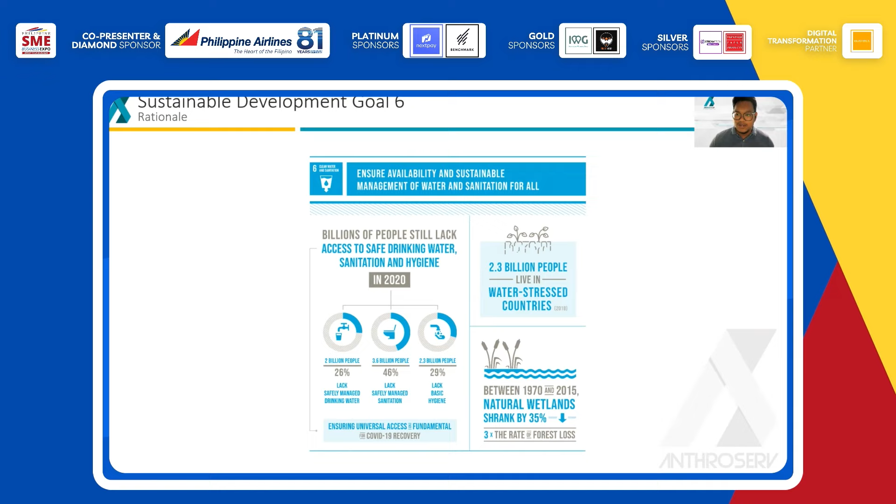So to start, we look at the status of the world in terms of the lens of the Sustainable Development Goals. We know that there's a Sustainable Development Goal 6 that is focused on ensuring availability and sustainability of water and sanitation for everyone. Unfortunately, this is the status of the world in terms of drinking water access, sanitation access, and basic hygiene.

So, those are the numbers. Up to 2020, there are still 129 countries that are not on track to have sustainably managed our water resources by 2030. So the UN SDG tells us that our current rate of progress on water and wastewater management needs to be doubled. Now, we know that currently, we are having another imminent water crisis.

We have very low water resource capacity right now. And in terms of wastewater, we don't really appreciate it because we think that it really doesn't affect us. But later, I'll show you how it is directly and indirectly affecting our lives and our businesses.

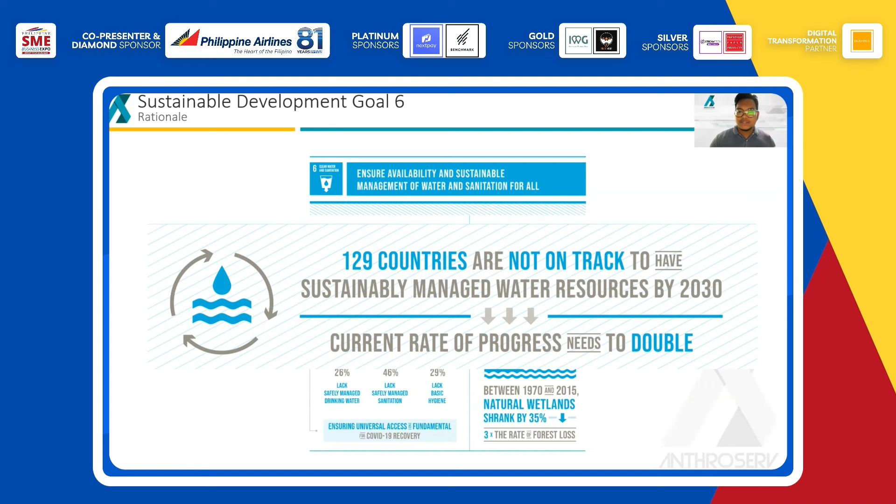So let me start by, of course, defining what is wastewater. Wastewater, in simple terms, is used water. So if it does not already serve its original intent, it is already considered as wastewater. And we classify wastewater into three: residential, commercial, and industrial.

So why do we have to classify our wastewater based on these three? One, of course, because they have different qualities. The wastewater produced by residences is different from that of each type of commercial and industrial establishment. But the second, and most important reason, is that the state does not require residences to have their wastewater treated.

In the context of Metro Manila, we have the water concessionaires, Maynilad and Manila Water, who are responsible for treating the wastewater of the residences. However, commercial and industrial establishments are not covered. So they have the obligation to have their wastewater treated by any means, whether through third-party treatment or on-site wastewater treatment.

This is very important in the context of this expo, because if you're a business owner and you own your own facility, and of course it is tagged as either commercial or industrial, you have to know that you have to treat your wastewater.

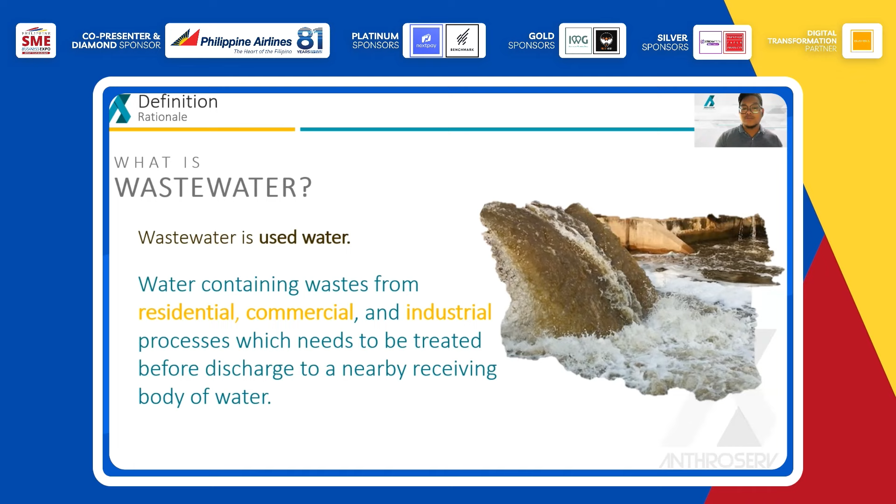What is the basis of wastewater treatment? Of course, we have first the legal framework, or the legal rationale. This is anchored by RA 9275, which is the Philippine Clean Water Act. And its implementing regulations are defined in DAO 2016-08 and the recently passed revision, DAO 2021-19. We also have PD 856, or the Code of Sanitation of the Philippines. So those are the legal frameworks that we have now in the Philippines.

But the most important is the social impact. First, the health risk. It has been studied that lack of wastewater management increases the risk of diarrhea, hepatitis A, and leptospirosis. And then obviously, we have the environmental impacts, destruction of nature and ecosystem.

But to better appreciate it, if we combine all these effects economically, the World Bank estimated in 2008 that we are losing 77.8 billion pesos per year due to poor sanitation. This is due to sickness or inability to access free water, like our groundwater here in Metro Manila.

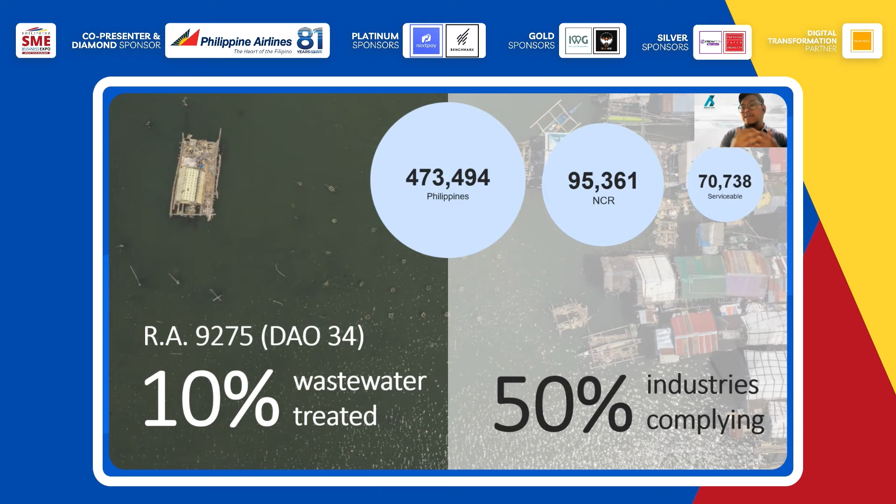So we are here. I am here. We are Anthroserv, and we are here to give you alternatives on how we could bridge this gap. First, we have to identify — we have to know the waste management hierarchy.

Of course, before we think about wastewater treatment, we have to think first: could we reduce our wastewater generation? That's the first step.

If you could reduce, you could analyze the water — how you use your water in your facility. You can reduce, and of course, that reduces your wastewater generated.

If that's not possible, you could do on-site recycling — maybe one process's water could be diverted into another process as raw water. So you could do that. These two practices are what we call resource efficiency and cleaner production practices.

But of course, you really can't avoid generating wastewater. So we have off-site recycling, treatment, and ultimately disposal — which is what we're trying to avoid, disposing untreated wastewater. These are called end-of-pipe treatments.

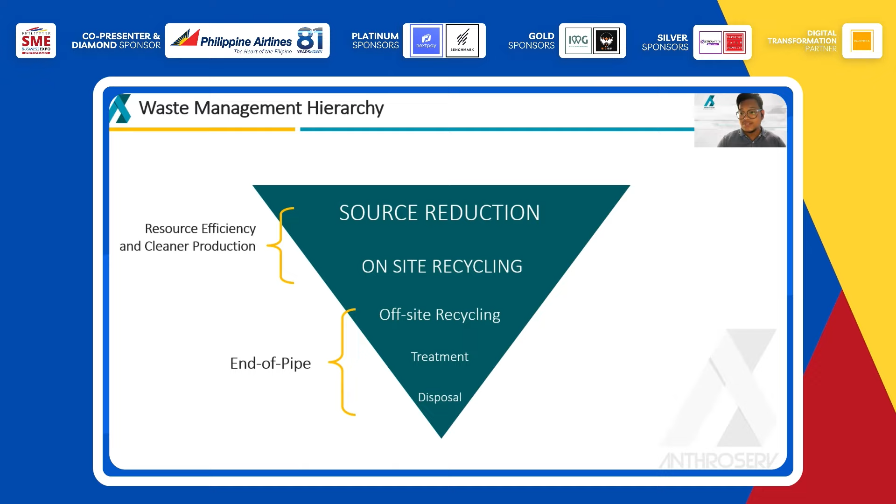So before we talk about how to treat the wastewater, let us always look first at how we could reduce wastewater generation, and how we may introduce on-site recycling. Anthroserv offers consultancy services for facilities to do this first, prior to wastewater management.

In terms of wastewater management, there are two strategies. The first is what we call the sewerage strategy, and the second is the sanitation strategy. We could differentiate them by looking at our septic tanks.

For septic tanks, the common type has two chambers — the first and the second. In the first chamber, solids build up. Usually, this is what gets hauled out by our trucks, and it is treated. That's the sanitation strategy.

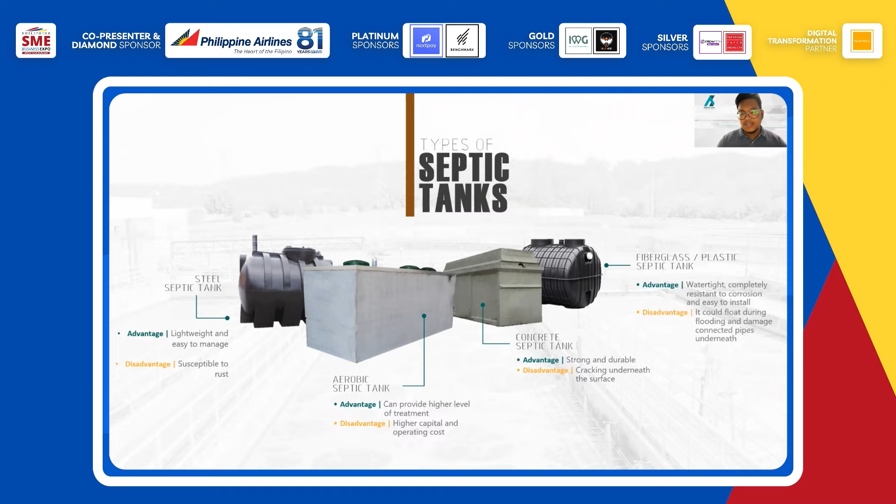So we have here the different types of septic tanks. Of course, all facilities have their own septic tanks. To manage your septic tank, based on the sanitation code, you have to have it collected — about a 5 to 7 year cycle.

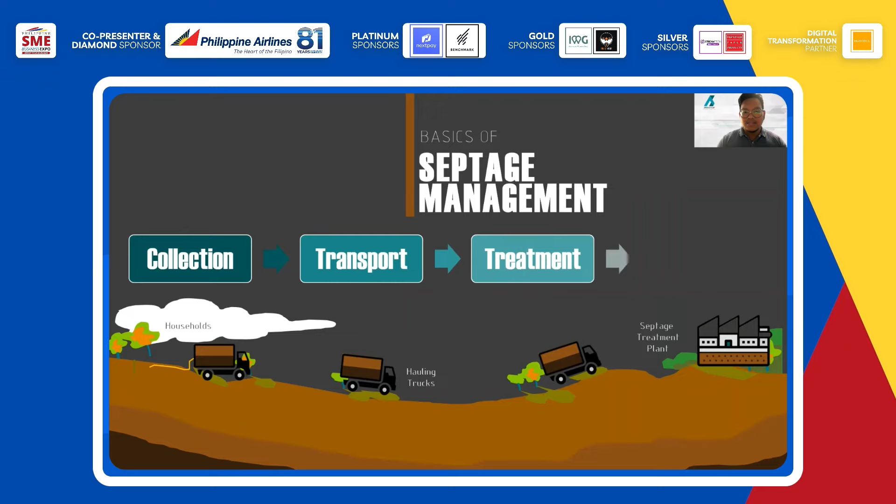You have to haul your septage, as it's called, and this is the basics of septage management — you have trucks to collect and transport it to a certified treatment facility prior to disposal. That's septage management. Next, we've seen the sanitation component, the septic tank.

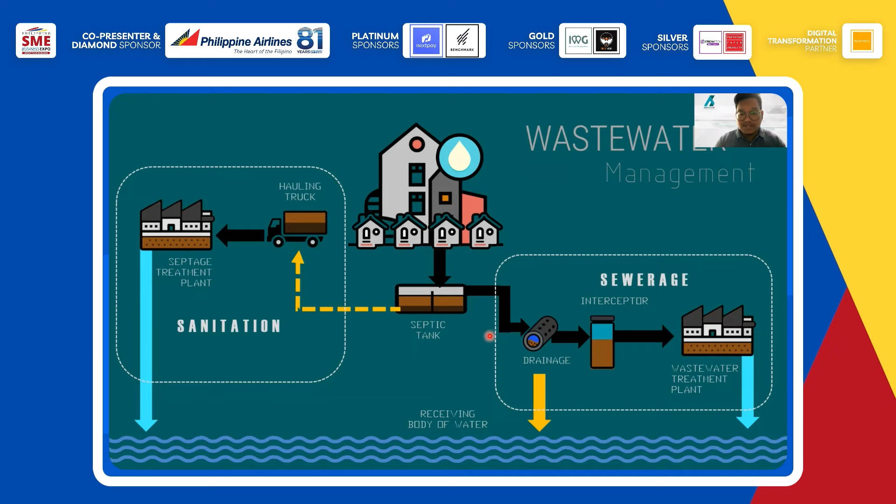Now let's look at the liquid component — how do we treat the sewerage? This is what we call wastewater. So this is the sewerage strategy.

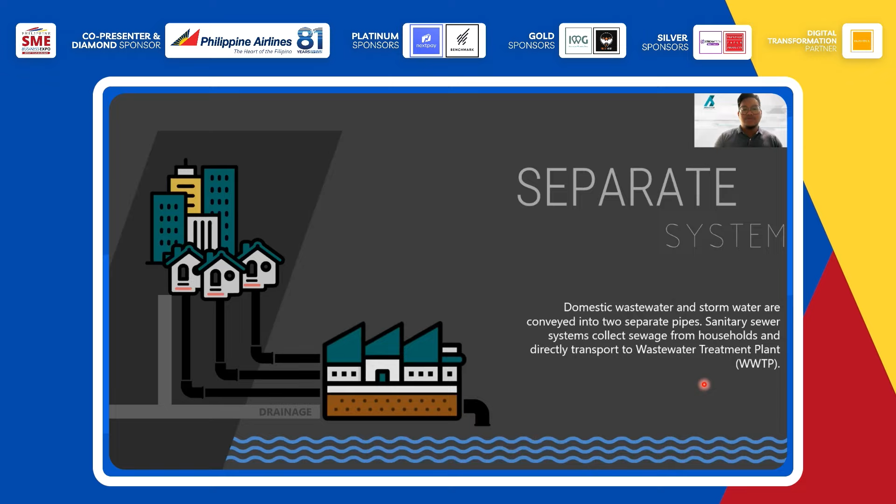The sewerage strategy can be further classified into two. The first is the separate system, where pipes tap directly into the septic tanks, directly to the wastewater treatment plant. If you have a facility and know there's a nearby wastewater treatment plant — for example, if you're in Metro Manila — you could ask Manila Water to have you connected. But of course, they'll analyze first if it's possible. That's the separate system.

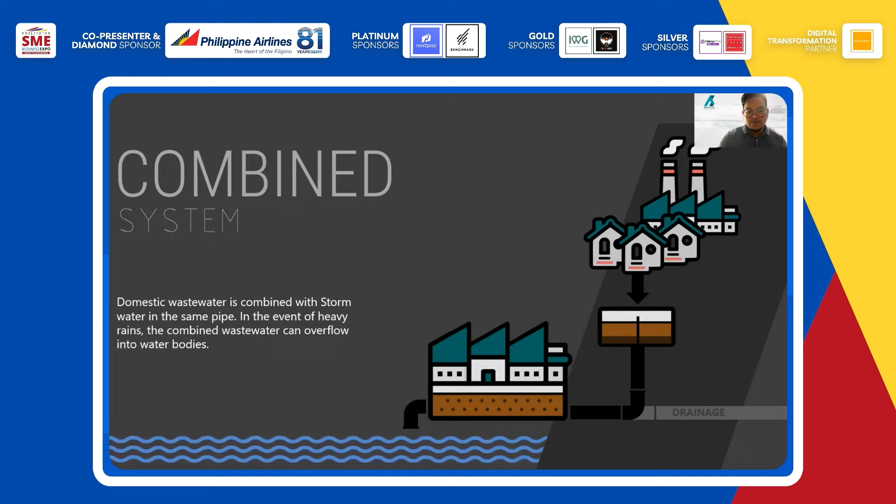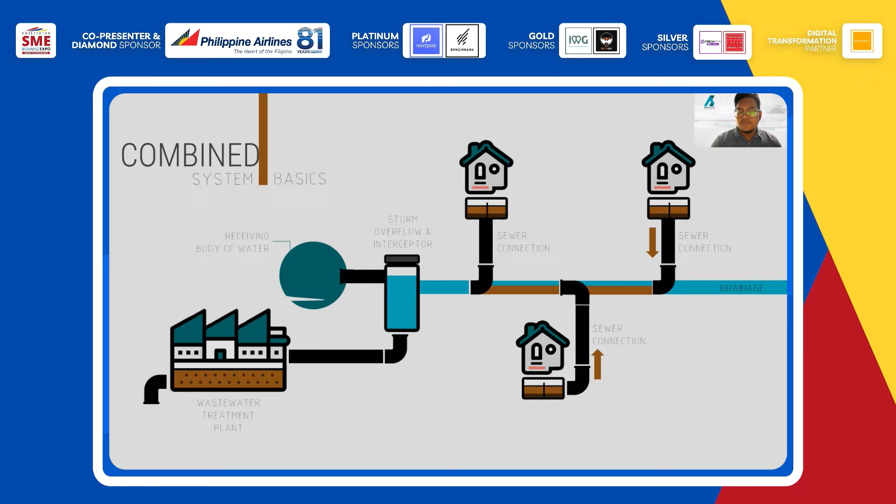Next is the combined system, which is the faster alternative — you just connect to the drainage, where the drainage is intercepted and diverted to a wastewater treatment plant. This is commonly implemented in residential areas. Usually, if you are commercial or industrial with specialized wastewater, you have to have your facility directly tap into a sewer pipe.

Now, this is the environmental impact. Let's go into the specifics. So these are the usual parameters that are being treated: BOD, COD, TSS, up to pH. And all of these are pollutants in their own manner, with different sources.

The BOD, COD, TSS, ammonia and nitrates, fecal coliform and phosphates all come out from us, from our feces, from our discharges. And others like oil come from households. And of course, it differs depending on what type of facility you have.

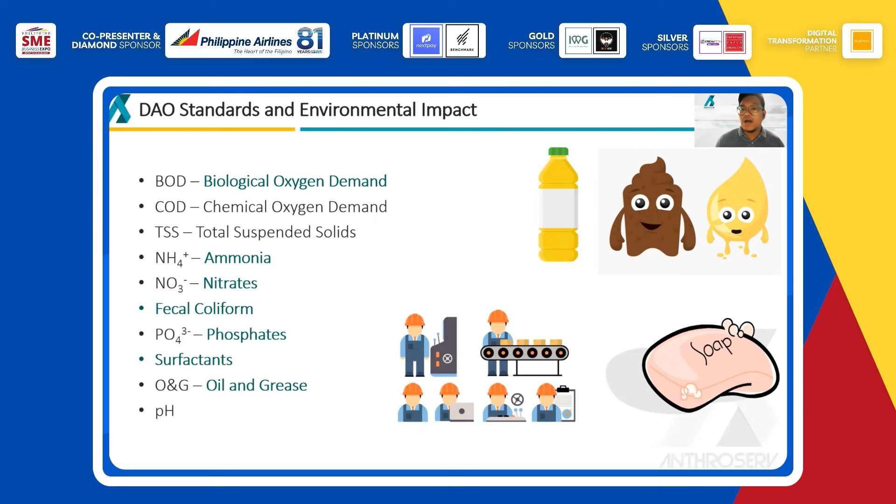Its impact is undeniable. For example, if we discharge high BOD in the receiving body of water, we could expect a fish kill in the long run. And if we have high solids in our wastewater, we could expect sludge buildup in the water body.

So this is the reason why we see algal blooms. There have been recent reports of algal blooms, particularly in Boracay. That's what incited the closure of Boracay, because of them not treating their wastewater. So these are the impacts.

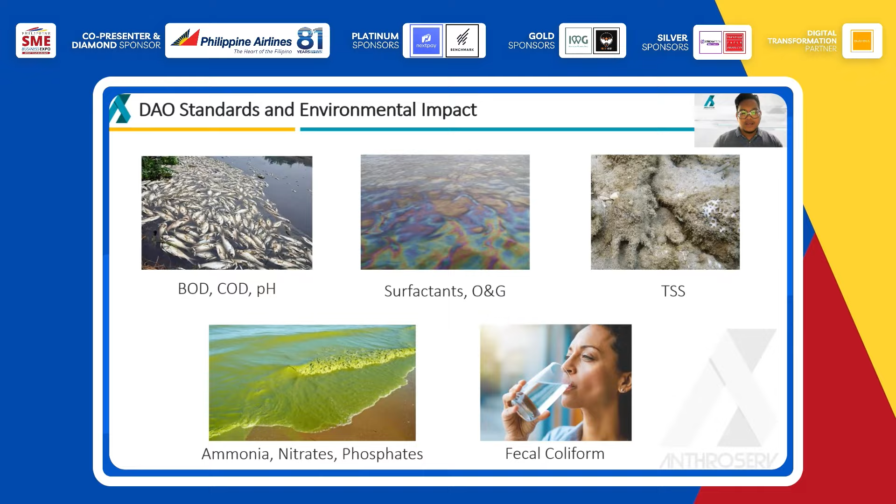Now we go to the first point. We identified three common causes on why businesses do not treat their wastewater. The first is lack of access to technologies. So let me show you the different treatment technologies that the market has.

This might be complicated, but what I'd like to emphasize here is that a wastewater treatment plant is like a puzzle that you need to solve. There's really no wastewater treatment technology that can solve everything.

Unlike what many technology providers would say, because they are selling their own product, they'll say it works for everything. But we believe otherwise, because wastewater treatment is a puzzle.

Depending on the type of wastewater you have, what you want to treat, and how clean it needs to be, there are different processes or technologies that need to go hand in hand. So we have physical, biological, and chemical processes, as shown in the picture.

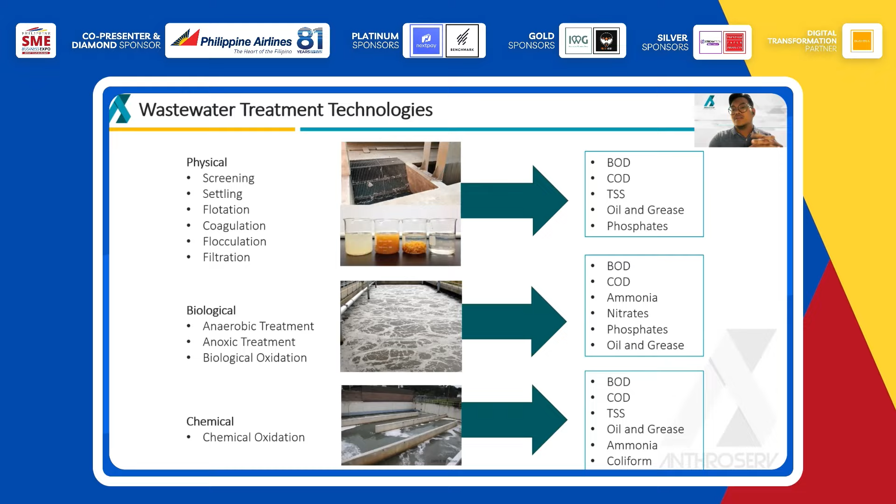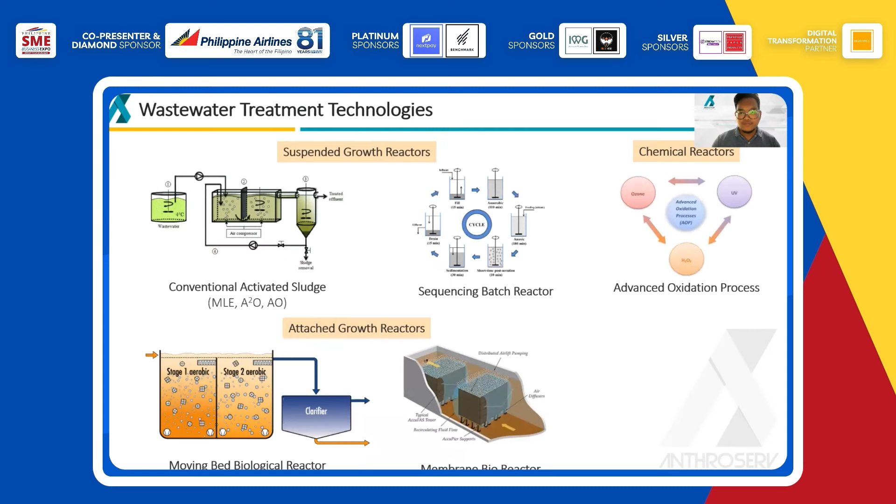But we could classify them into three: suspended growth reactors, attached growth reactors, and chemical reactors. These are common in the market. Usually, as a business owner, you just need to consider which one fits you, considering lot area, capital expense, operational expense, maintenance, complexity of operations, and process durability.

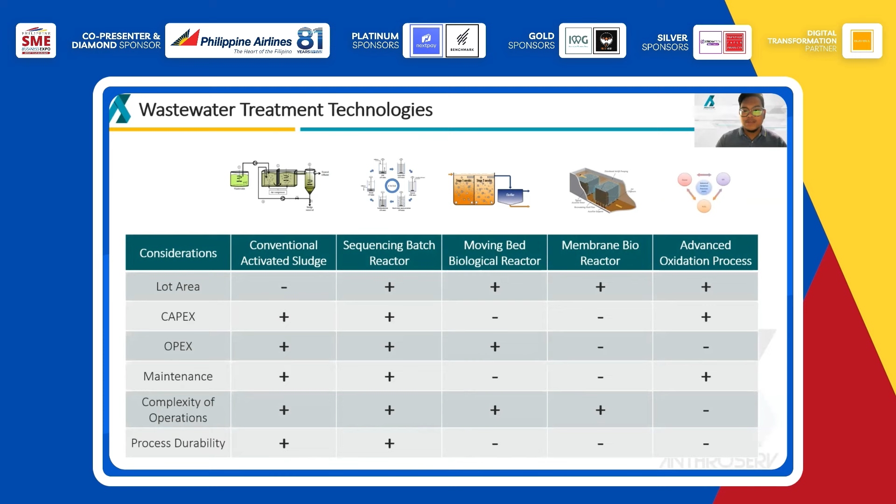This is our qualitative assessment of each technology, but of course they have their own strengths and weaknesses. This table doesn't say that the SBR, or sequencing batch reactor, is always the best. It depends on the client's needs. So if anyone tells you their technology solves everything, it is not true. It really depends on many factors.

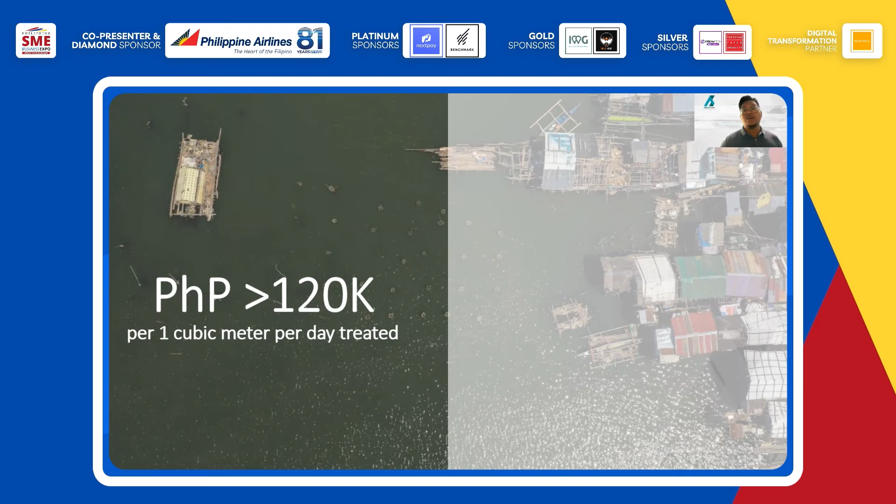Next question, how much is it? Usually its cost is around 120,000 pesos per cubic meter treated. So, for example, if you're generating 20 cubic meters per day, your capital expense would be 2,400,000 pesos. And it's bound to increase by 50% because of the new standards.

Yeah, so this is quite painful. It's not really an investment if you think about it, but you're going to really invest a lot, as much as millions, to do that.

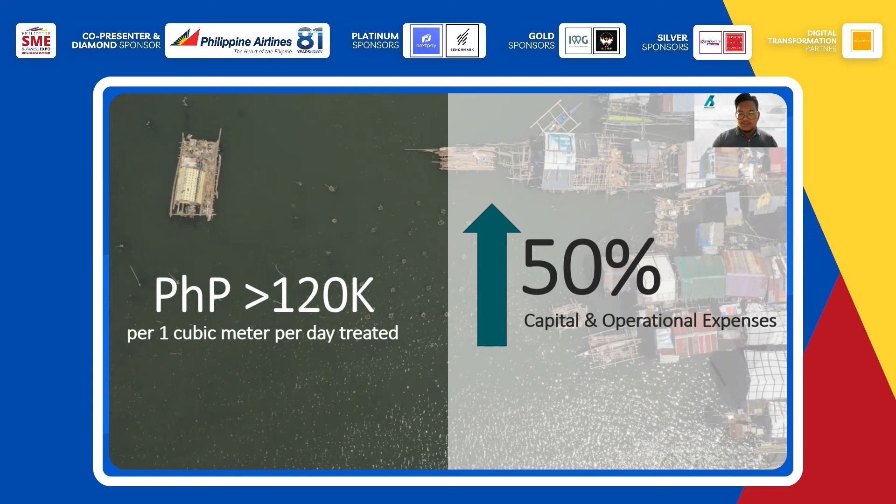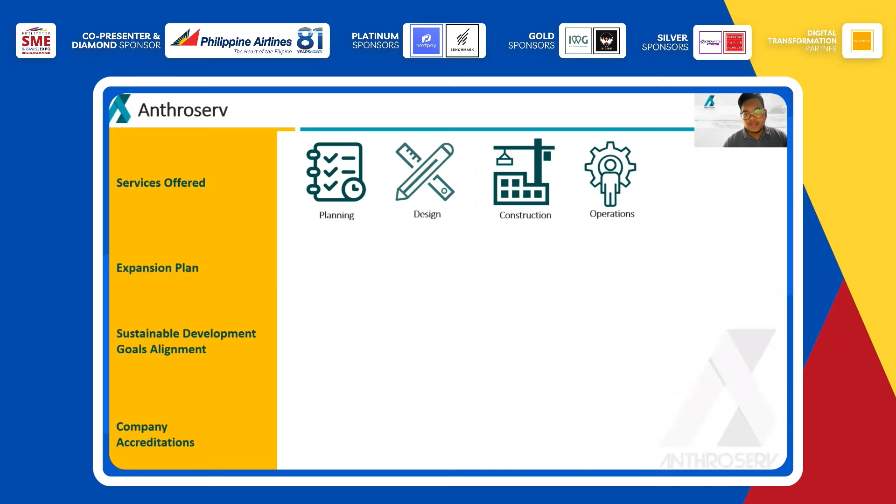That is why Anthroserv developed a low cost solution. But we do offer customized solutions depending on client needs. We do planning, feasibility studies, design, construction, and operations. But apart from wastewater, we are expanding our engineering services to water, energy, industry infrastructure, and industry efficiency.

But we're focused right now on SDG 6 because this is where we see the most need in the market right now. Our thrust is towards the attainment of Sustainable Development Goals 6, 7, 9, and 12.

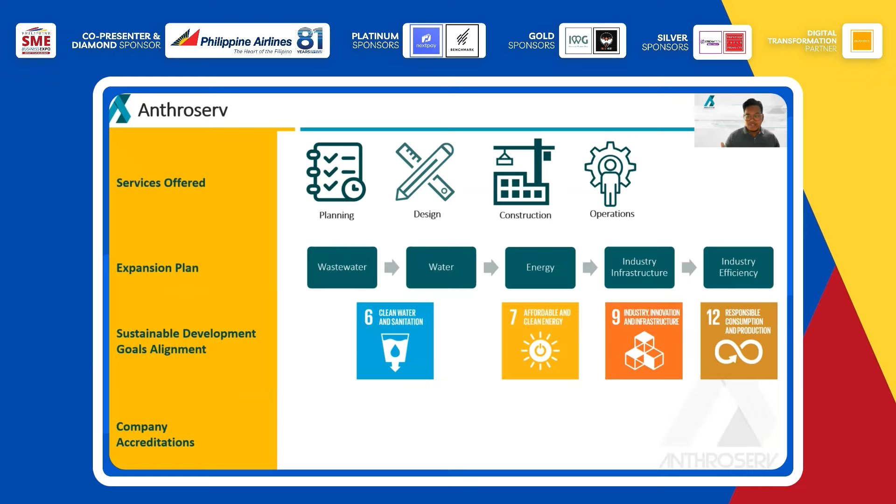We do offer that, but for MSMEs who have a very limited budget, since they're just starting, yeah, we have developed our own product.

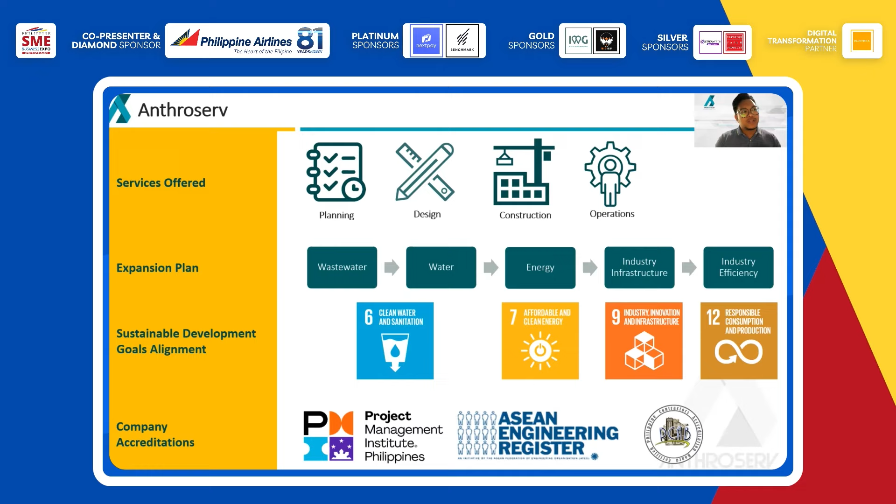That is a wastewater treatment plant in puzzle form. It is ultra low cost, we call it AquaBlocks.

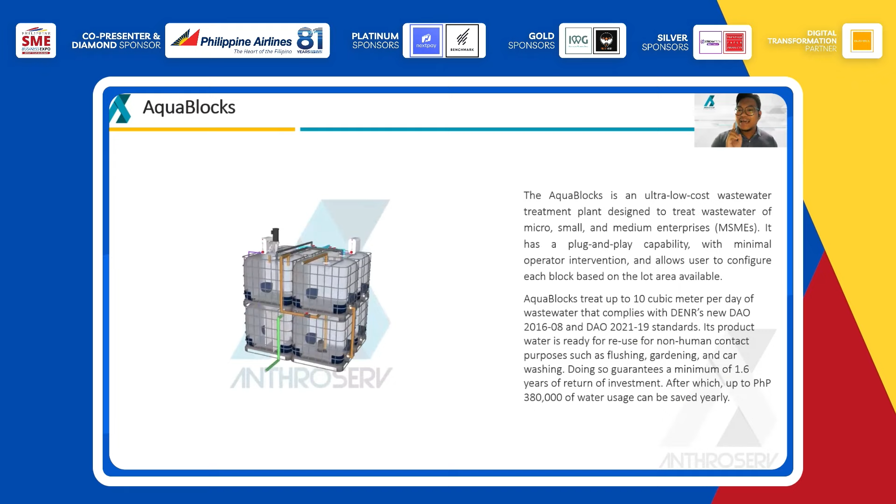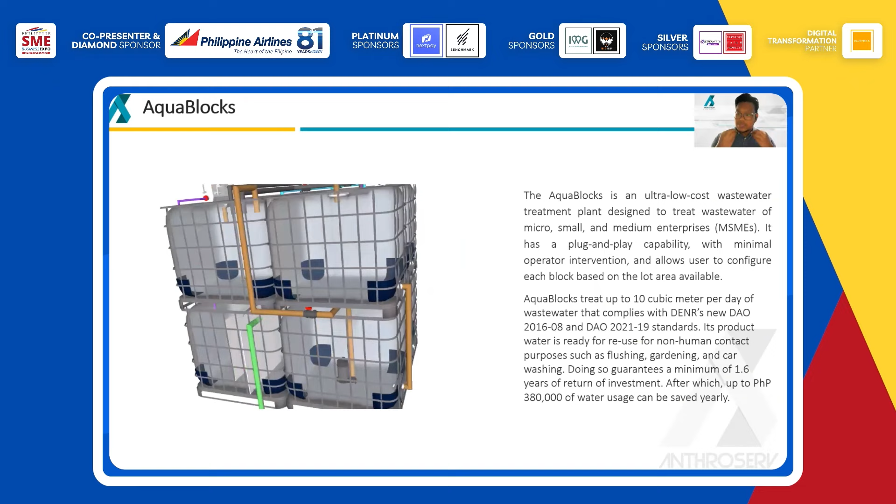It is an ultra low cost wastewater treatment designed for MSMEs. It has plug and play capability, meaning when you order it from us, we bring it there, install it, and it automatically treats your wastewater. It allows configuration depending on the need, of course we have to assess first what you need. It could treat up to 10 cubic meters per day since these are for MSMEs only.

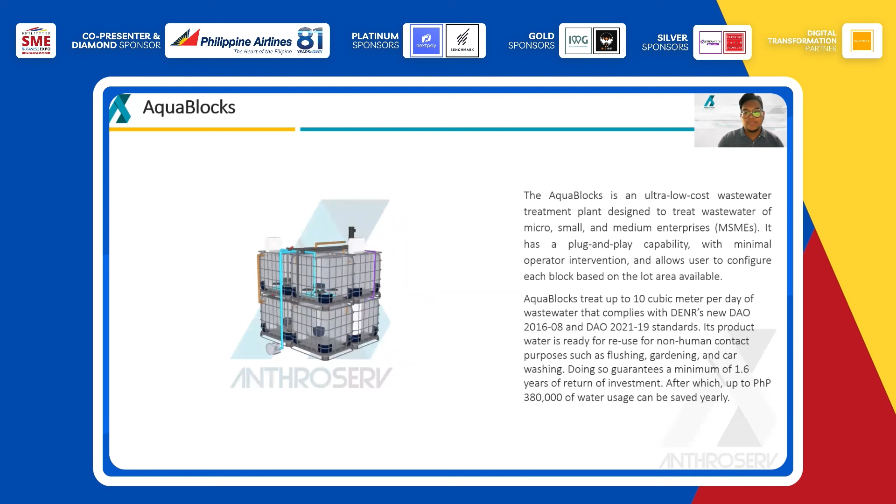It can produce water that is ready for recycling. We shifted the view of it from being a non-profitable investment to a profitable investment, because you could generate savings up to 380,000 annually if you use this product. So let's go to the specifics.

It costs around 900,000, and it already includes everything that you need: drawings, reports, chemicals, startup manuals, training, product warranty, and a discharge permit. All legal compliance is already there.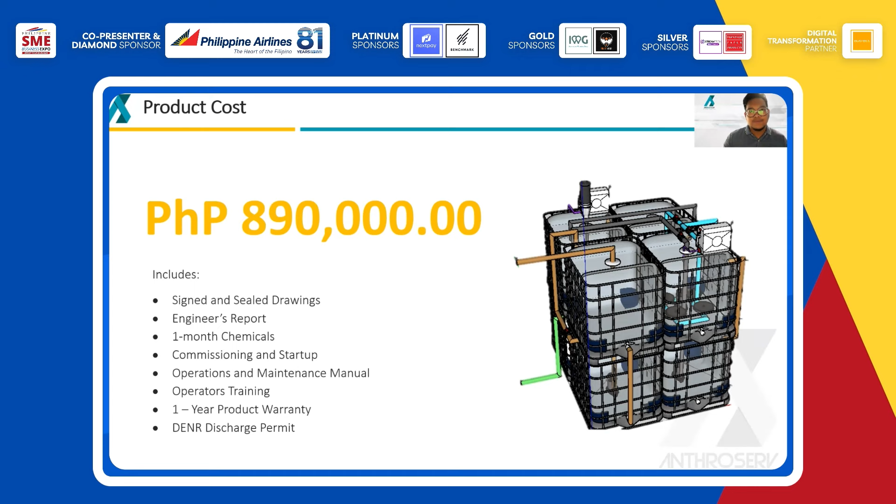If you look at the market, that's the third reason we cited earlier that discourages businesses from availing of wastewater treatment - it's because of the price. It's always in the millions. So because of AquaBlocks, we're comparing it to other products.

These are real prices there. Ours is the lowest, only 890,000, and it's effectively about 89,000 pesos per cubic meter of treatment.

And it's movable. We know majority of MSMEs are leasing their lots, so if you transfer locations, you could transfer the treatment facility too.

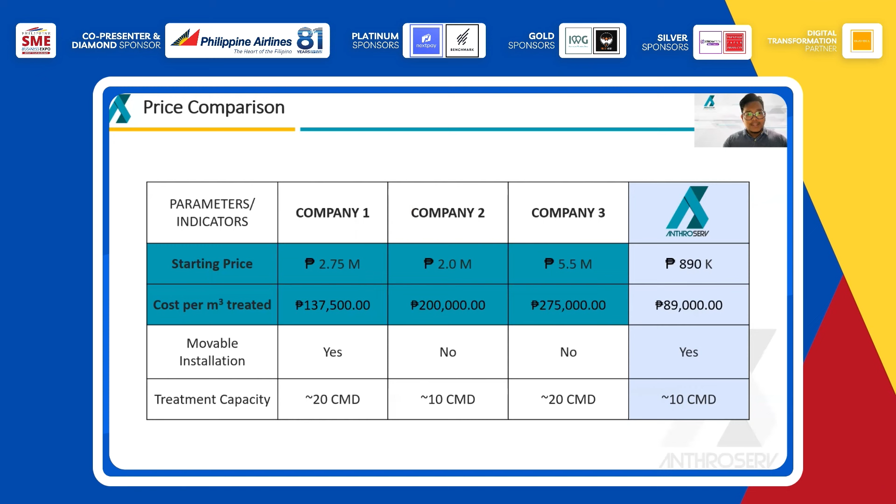We could shift it from a non-profitable investment to a profitable investment if we shift our wastewater treatment to a water recycling facility. So the wastewater treatment, the water could already be used for recycling and could save up to 380,000 pesos annually.

Based on that, you could have a return of investment of around 2.5 years. After that, if you continue recycling, effectively you are saving it as if it is a profit, and it translates into your profit.

So that's our pitch - that AquaBlocks is very cheap, and it could generate savings to your facility, with an ROI of 2.5 years.